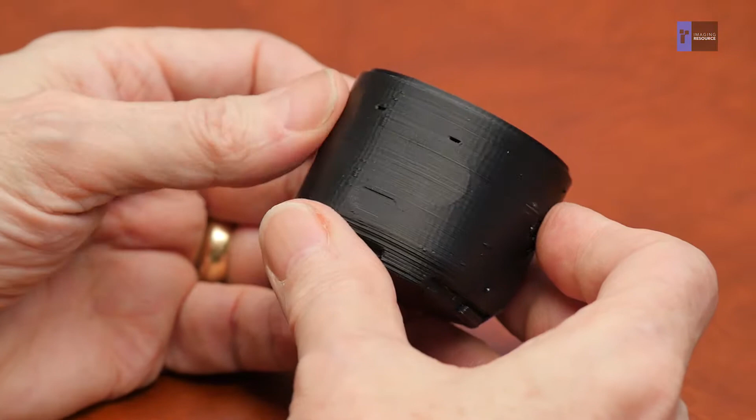At the 2015 CES, we had the opportunity to find out about a new Olympus effort called the Open Platform Camera Project. The interesting thing here is that Olympus is actually releasing both a software development kit and 3D CAD files so that people can interface to the unit.

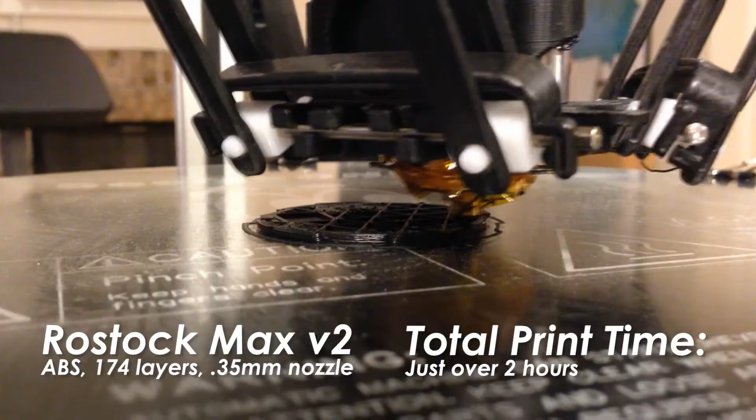One of those types of files, the STL files, you can use to make a 3D print, which we have right here. I printed this on my Rostock Max version 2 3D printer. Let's get a sense of the size of the thing.

Basically, there's a micro 4/3 flange on the front. They don't release the micro 4/3 flange mount with the data because I think that probably belongs to the micro 4/3 coalition. Then there's a flange on the back that you can use to attach it to whatever you've built, and there's also a couple of little mounting screws. They're hex head screws on the original that you would then remove to be able to bolt it into your own system. It's a little hard to see.

There's a little power button right here. There's a broad, shallow button, and I'm not really sure what that is, whether that's actually a button or if it's just a grip. This is kind of interesting - these two little slots here, I thought that the printer had glitched. I haven't really got it dialed in yet, and I thought that maybe it hadn't printed something. But it turns out they're actually there on the model. I think those are the microphone holes for a stereo mic.

Moving around the body, as I said, there's one of those little hex head screws - they're opposite each other on the body. Go along a little bit further, there's a tripod mount which is nicely removable, so you can replace it if you want, or you could probably even bolt something different in there. Then over here we've got the mounting screw again, and then two latches - one's a latch for the micro 4/3 mount, and the other one's a latch for the flange on the back.

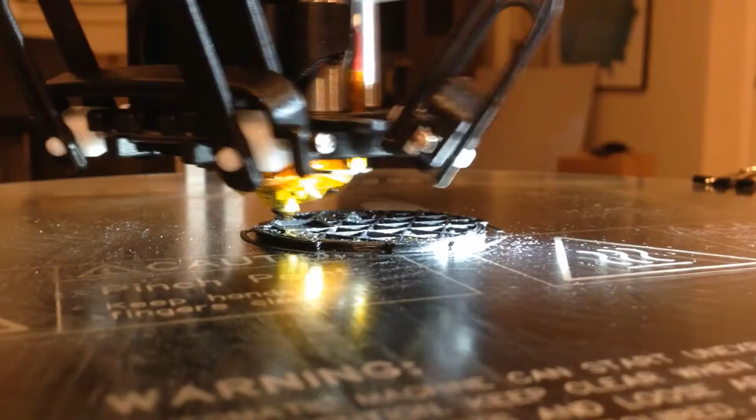The back's a little bit messed up - as I said, I haven't got the printer dialed in. Down here by the flange, there's a bunch of filament hanging out there. It's because I didn't put in any support material to hold it up when the printer was trying to print over air. But you get a sense of the flange.

On the back there's a little micro USB connector for talking to it, and I would guess for charging. I'm not sure what this is - I think it's just a latch to open the back of the unit to take the battery out. As far as you know at this point, I don't think it has a micro SD card inside. I think it's got internal memory, and other than that it just transfers files back to the host, whether it's Android or iOS or what have you.

But the cool thing about this is that we've actually got - you can see what size it is here. Here it is compared to an EPL5. You can see it's actually pretty compact. We don't know any of the specs for it yet, but I think it's safe to assume that it's pretty much got standard Olympus micro 4/3 guts inside it.

One of their standard live MOS sensors and the rest of the electronics, minus obviously the display and the control buttons. The cool thing about this is there's a flange up here, and we can actually mount lenses on it. So this is one of the 14 to 42 millimeter kit lenses, the telescoping one. There it goes. So it gives you some idea of the relative size there.

I don't know, in use you may want to use it with a prime. I've got - where does it go here? Here's a really nice 12 millimeter f2 prime. It's an attractive little package. Or if you want to go a little bit longer, here's a 25 millimeter f1.8.

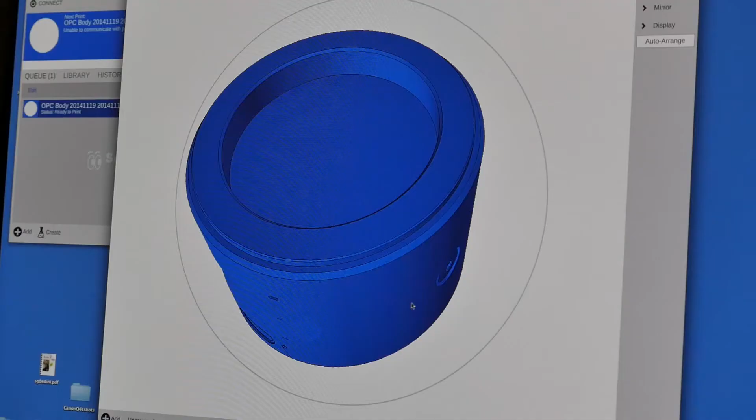So it's really a pretty cool gadget, and they provide design files both in the STL format, which is what you use for 3D printing, as well as an STP or STEP format that's a common interchange language between CAD programs. Besides the file that lets you print the body of the camera, there's also a file for the flange, and I think there's even an iPhone case with the flange on it.

This got a little bit messed up here, as I said, because I don't have the printer really dialed in yet, and also I didn't use any support material. But I really believe that with the flange you actually could print one with a properly dialed in printer. This is a little bit rough - I'm using a 0.35 millimeter nozzle to extrude the plastic, and it's got a 0.25 millimeter layer height. I think nozzles for my machine are available down to about 0.15 millimeters, and I could do a 1/10 of a millimeter layer height, so that would actually be pretty fine.

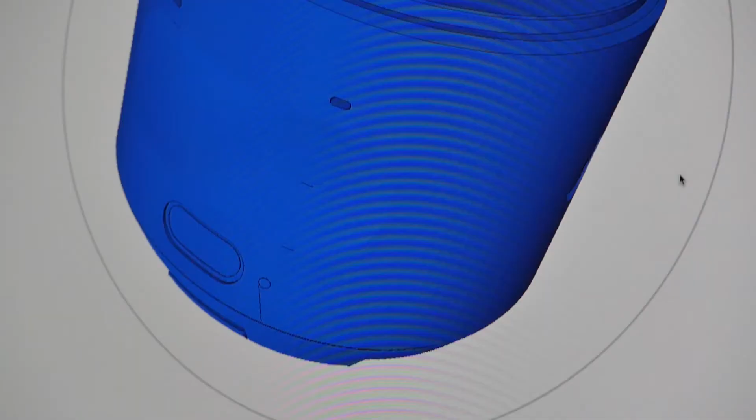This is also really tough plastic - it's ABS, which is what they make Lego bricks out of, so it's really quite strong. And that's pretty much it. I was just pretty excited that I'd be able to grab this file, print out a model of it, and then try lenses on it, etc., and also have the ability to build a mounting flange.

So far, this is just in Japan. Olympus at this point has done a hackathon, as they called it, at the Fab Cafe in Shibuya, the Shibuya area of Tokyo. They provided - they have laser cutters to cut stuff out of particle board, etc., and they also have 3D printers there. So they got a bunch of hackers together, and people made a variety of things around it. I believe they have another one coming up on January 22nd. So if you're in Tokyo, anywhere near Shibuya, you might want to get in touch with the Fab Cafe or check out the link to the OPC site that we have on our article.

Anyway, that's what we know at this point - just in Japan so far, but I'm sure it's going to propagate around the world. It's a camera that's got an open interface to be able to program and connect to, and it's got an open mechanical design that you can use to build it into your projects. So that's the Olympus OPC, the Open Platform Camera.